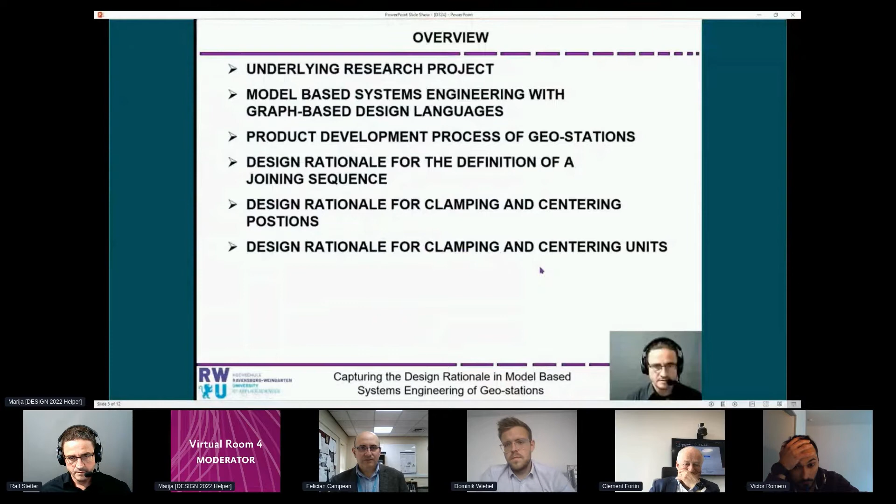The underlying research project is called Digital Product Lifecycle, and there is a block talking about research theory, methods, and software development. There's a system integration happening using design languages, and we develop the engineering framework through the steps of requirements, design, product architecture, modeling, simulation, test, digital factory, and cost and energy analysis. So the whole product lifecycle in a digital manner, and there are different use cases. One is focused on automated design and digital factory.

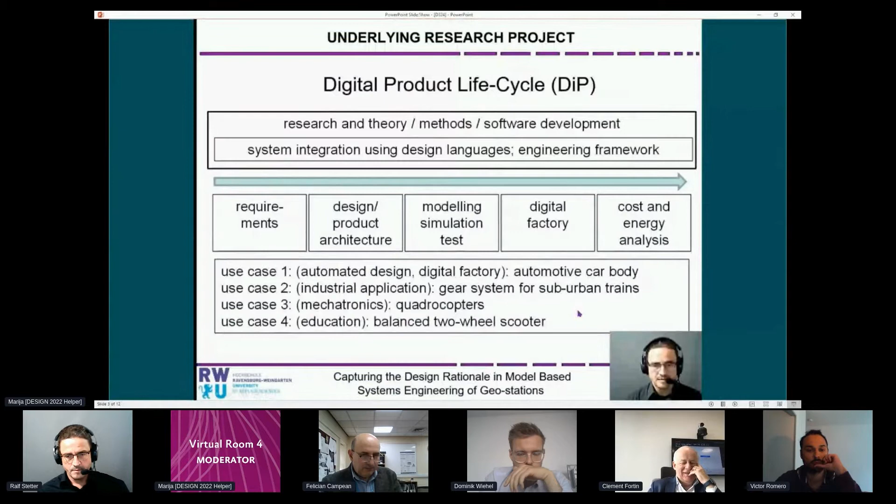That's where I present today about automotive car bodies. We also look at gear systems for suburban trains, for quadrocopters and multicopters, and balanced two-wheel scooters as an educational use case. So a main part are graph-based design languages.

When we have graph-based design languages, we have some programming happening. There's vocabulary and rules which build up a design language, and this is programmed by human beings on the basis of certain ontologies, abstract geometry, abstract physics, and so on.

And then if this design language exists for a product family, it can be compiled using a certain kind of software developed at the University of Stuttgart, Design Cockpit 43. This is a compiler, and the result is a design graph, which can be transferred into multiple data formats that are generic, like for Siemens NX, CATIA V5, MotionSolve.

If you look at multi-body systems, finite element methods, or OptiStruct, and so on, there's a general information flow from the human definition and programming in the design language, then to a machine compilation and execution on the right side. This is done by an engineering framework based both on unified modeling language together with graph-based design languages.

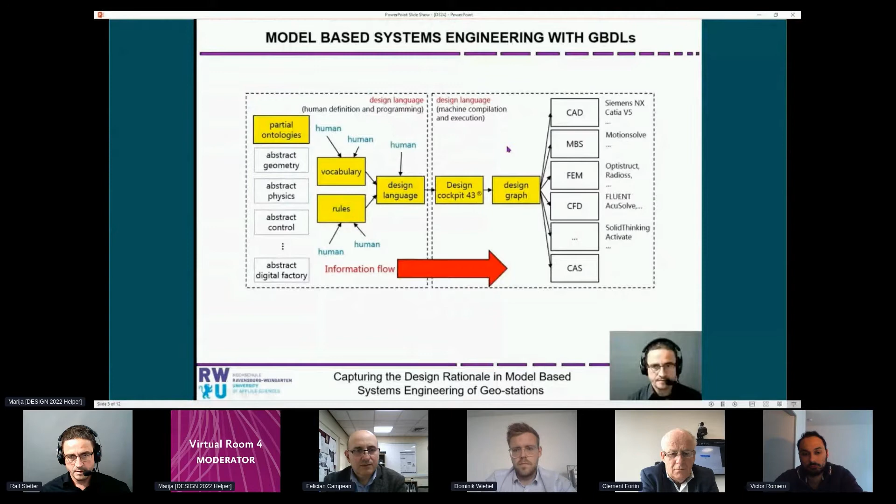Now, at this time, we want to focus on Geo-Station. A Geo-Station is a station in the assembly line of automotive car body, and it's used to ensure position and orientation of several product components, so they are brought together.

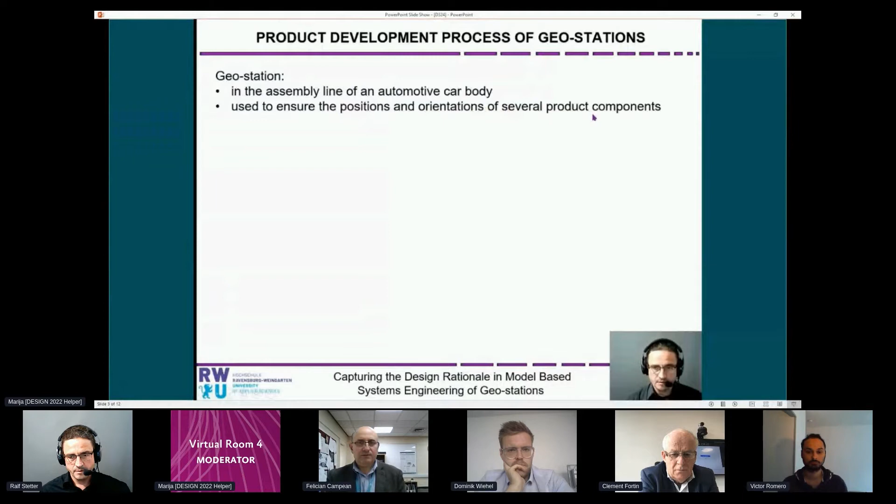If we look at the process, we first have requirements from the product. We have product components leading to a joining sequence, and then a production concept, which is the main point we'll discuss here. There will be the joint positions, and a setup and fixture concept. There are also requirements from layout. Everything needs to be accessible and reachable, so there will be interference objects and robot positions.

From this, packaging will happen of this Geo-Station. There is very important collision detection. And so finally, we will get to the geometry synthesis of the whole Geo-Station.

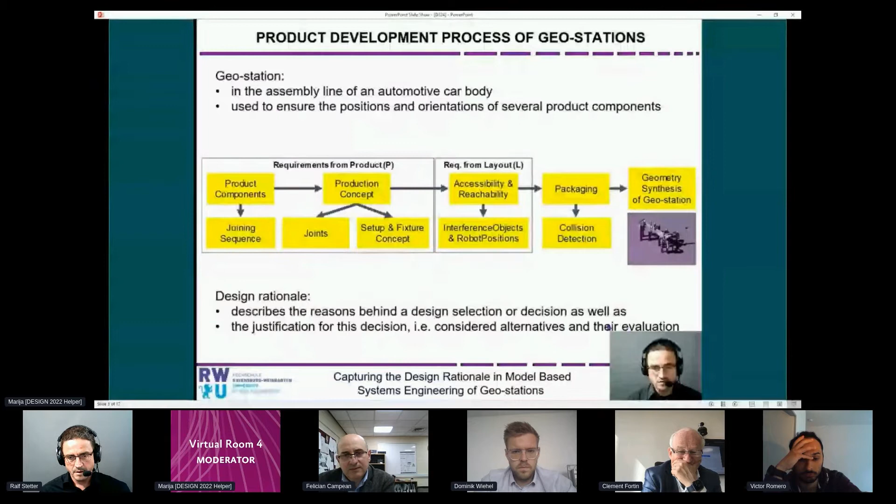One important point of this talk is the design rationale. A design rationale describes the reason behind the design selection and the decision, but also the justification for this decision - which alternatives are considered and how are they evaluated, so that someone knows why something was decided, why something was selected.

So if we look for the joining sequence, how the components are joined, here iterative search happens, and there are certain optimization criteria which build up the design rationale. This is accessibility and joining time. Here you see the exemplary definition of a joining sequence with the UML classes on the left side, and here the final assembly with two sub-assemblies.

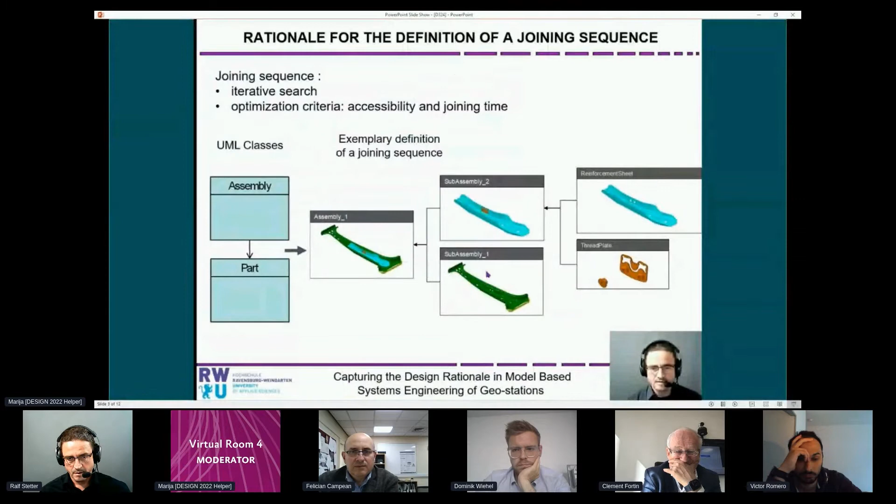One sub-assembly consists of a reinforcement sheet that you see here and a thread plate, and the other sub-assembly is the component itself, which is the B pillar of a car body.

The next step is finding the rationale for clamping and centering positions - where do I hold this part, this B pillar, and at which positions do I achieve a safe centering? Here you see the UML classes ClampingLoc and CenteringLoc for location, and here there are centering and clamping locations as seen here.

So usually in a production concept, there is a joining plan - where have the components to be joined - then a clamping plan, where are they held, and centering, how is their position realized. And in an engineering framework, a consistent representation of this is possible.

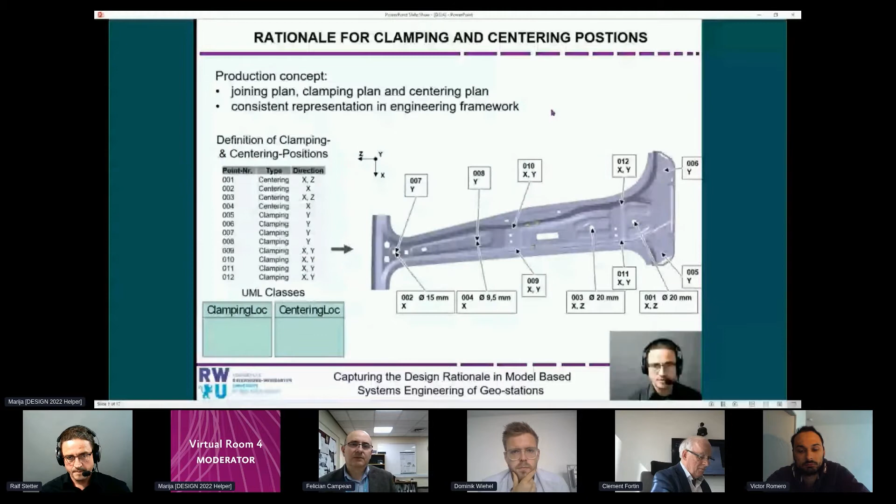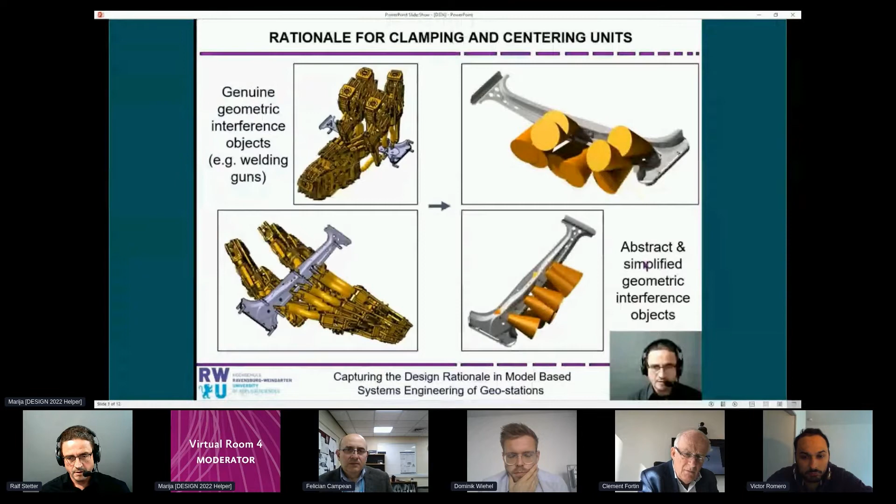Now, next step is to come to the real unit. So what we here have is, for example, welding guns. Here you see the genuine geometric interference object, which are really complicated, as you see here. And in order to allow a search for the best position, we work here with abstract and simplified geometric interference objects in order to be able to find the optimal places for clamping and centering units.

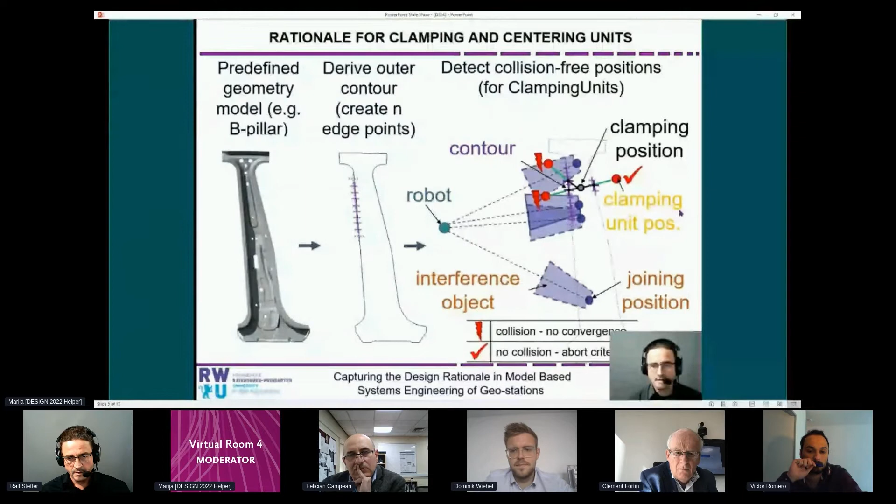Thank you very much for your attention.

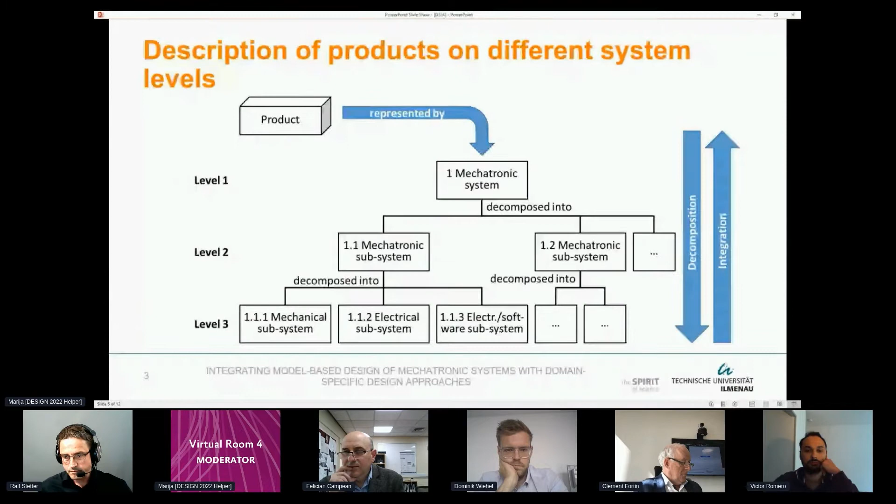Approaches for the development of mechanical subsystems are well known. The same can be stated for the other relevant domains. At the end of the development activities of the domain-specific subsystems, a detailed description of them must be available for the further product life phases.

However, the domain-specific approaches and models often reach their limits when connected to the mechatronic system levels. Systems engineering approaches are placed on the mechatronic system levels and mainly support the decomposition of functions and system elements, as well as the verification of the integration. Therefore, it is often useful to extend the known approaches at the mechatronic system levels with system engineering approaches.

Against this background, the following three research questions are discussed in the paper. How do systems engineering approaches help extending existing methodologies and methods to deal with different mechatronic and domain-specific system levels?

Which added value do semi-formal system descriptions offer at the mechatronic system levels? And the third one, which information has to be exchanged between the different system levels and how to do that? The questions are discussed in the paper. I would like to present you a few excerpts here.

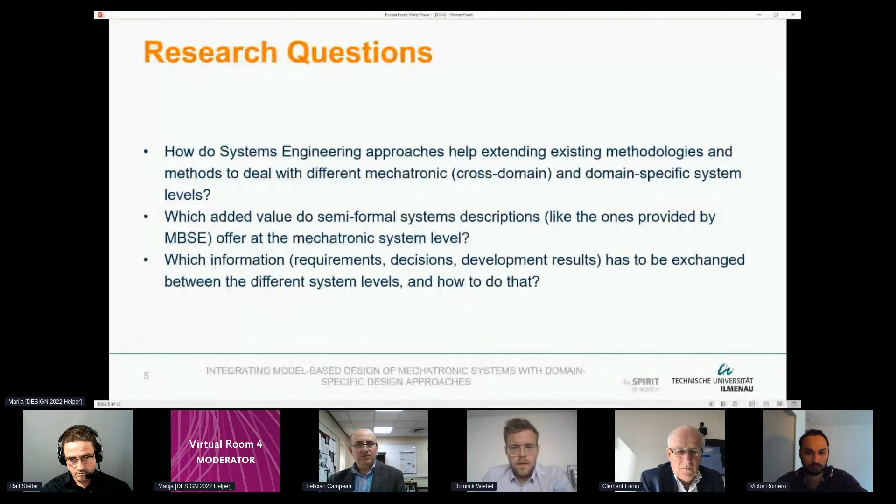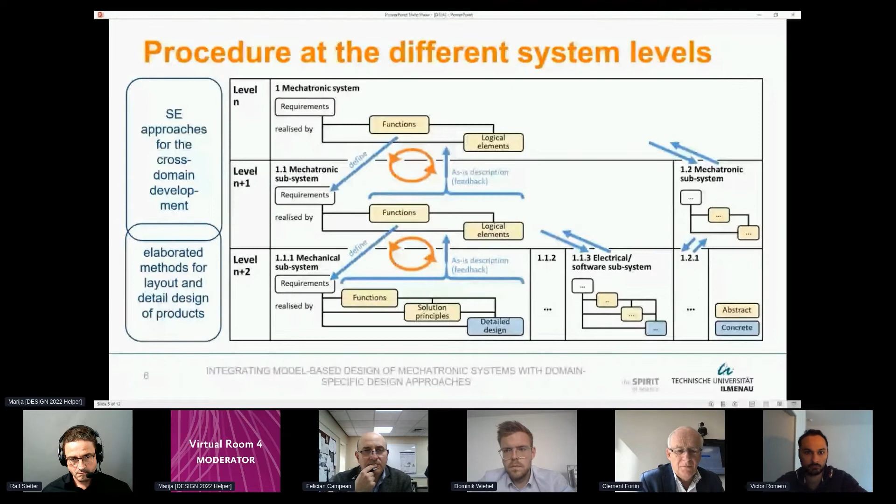Domain-specific approaches work very well as long as the functions can be implemented mainly by physical principles. On the mechatronic system levels, besides these functions, often logical functions are needed. Logical functions define, among other things, when which physical functions are active. These functions usually have complex dependencies and form complex effect chains. The handling of these logical functions and their decomposition is supported by systems engineering approaches. This is one reason for considering systems engineering approaches besides the domain-specific ones.

The paper compares the different goals and constraints of the approaches at the mechatronic and mechanical system levels. On the slide, you can see a part of the comparison. It is easy to see that the goals of the approaches have similarities, but there are also differences at the different system levels. Therefore, according to the current state of research, the different approaches should be used in a complementary way. For this, interfaces between the system levels are necessary.

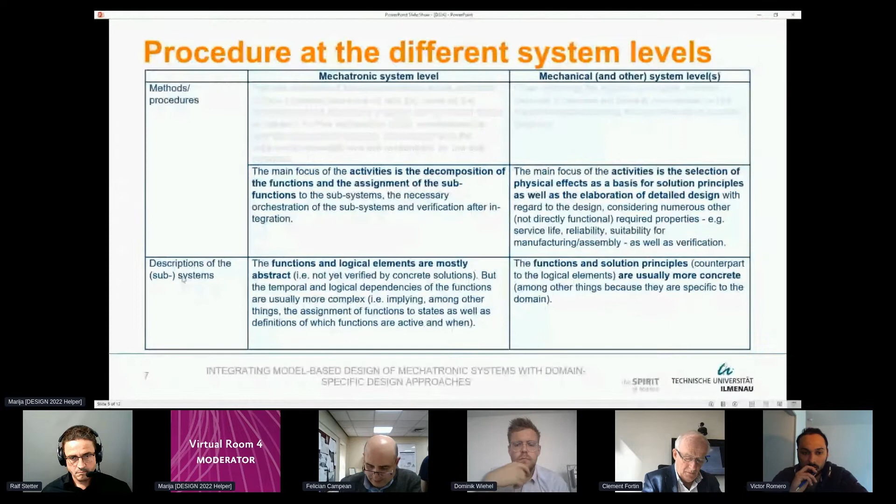The interfaces concern the methods and procedures, as well as the description of the system and subsystems, which are also compared partly in the table. The description of the system and the subsystems is done with different models. Important ones and related tools are shown here on the slide. Between the models of the different approaches, information must be exchanged bidirectionally.

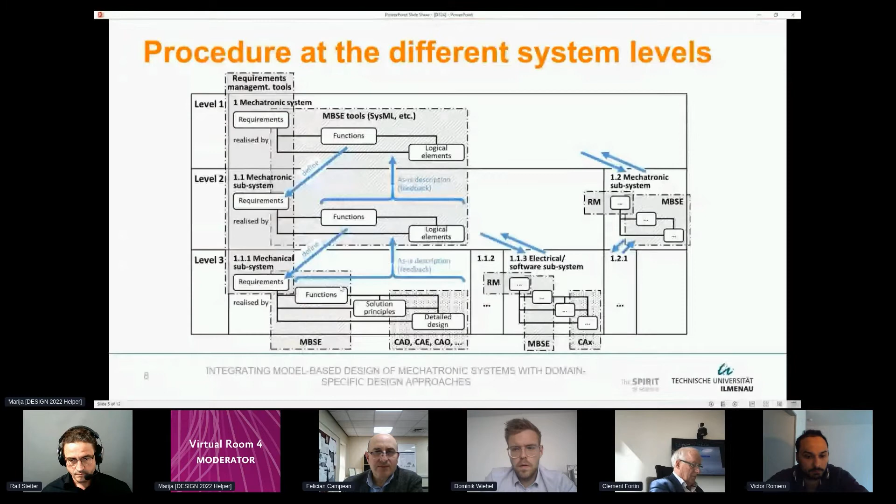When transferring information to the mechanical domain, these are primarily mechanical functions, interface requirements, as well as requirements for further decomposed properties. The combined procedure using different approaches on the system levels is explained using an example from precision engineering. Here, it can be seen that different decompositions on the mechatronic system levels are useful before the detailed development in the domain makes sense.

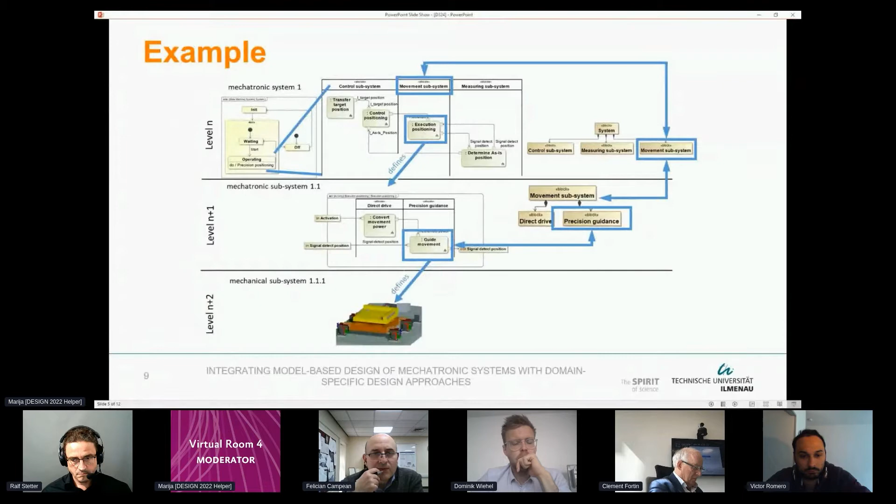The combination of system engineering and domain-specific approaches is becoming increasingly important. Interaction of the approaches must be clearly understood so that the approaches on the mechatronic and domain-specific levels can work together efficiently. A challenging question for the future is whether it makes sense to leave the different approaches in parallel or whether a merge makes sense.

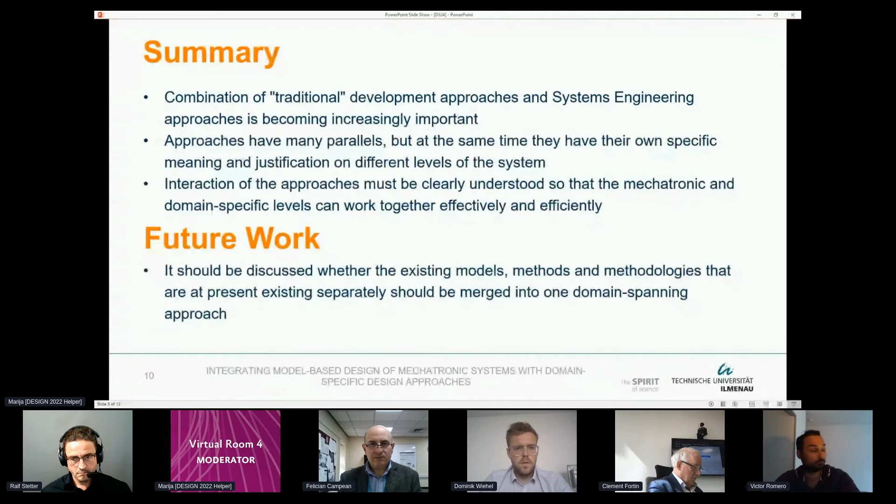This is a question that I would also like to discuss with you during the session. I look forward to the discussion with you during the conference.

Hello, I'm Victor Romero, and I will present you the work we have done with Romain Pinquié and Frédéric Noel, for which we propose a survey of model-based design reviews, the current practices, and the future challenges.

In the past years, we observed a paradigm shift from document-centric design, for which all the data produced around the design of a system are in a document shape, to a model-based design, for which each data produced is in a model shape. Depending on the community, there are a lot of different names for this kind of design.

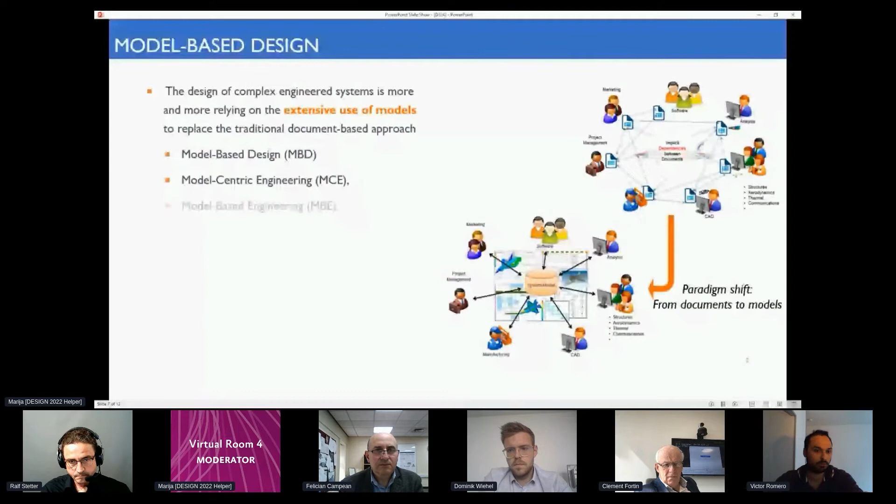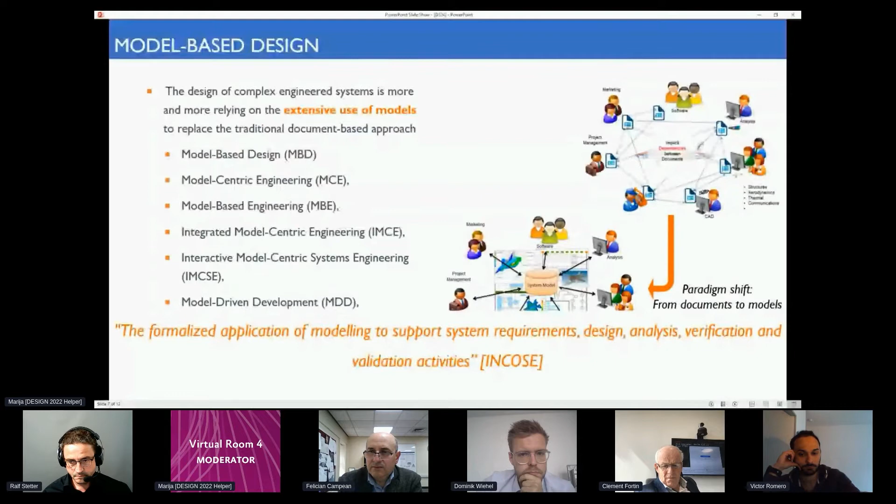We will use model-based design using the definition from the INCOSE, for whom the model-based design is the formalized application of modeling to support system requirements, design, analysis, verification, and validation activities. Now we want to understand how this paradigm shift has impacted the design reviews activity.

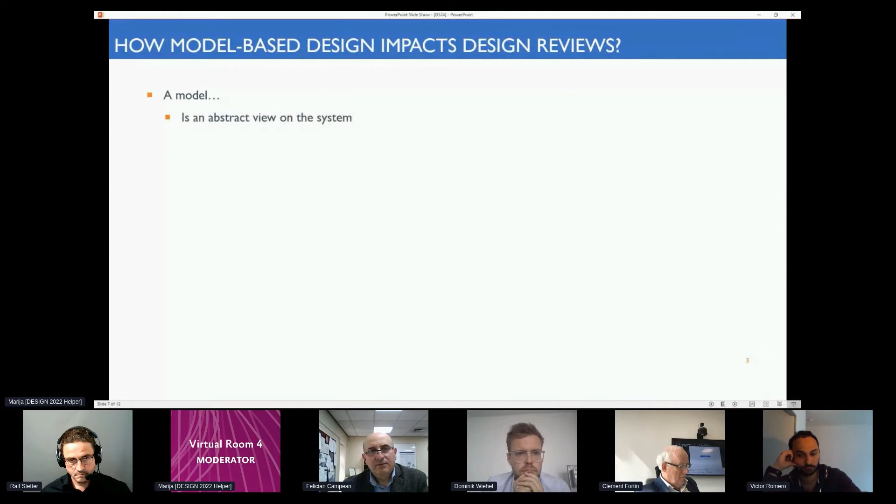First of all, a model is an abstract view of a system. It relies upon a domain-specific modeling language, and so we can produce this model with different software in different languages. And it aims at helping to answer questions. For example, is the specification complete or correct? We have there several examples of questions that models can help to answer.

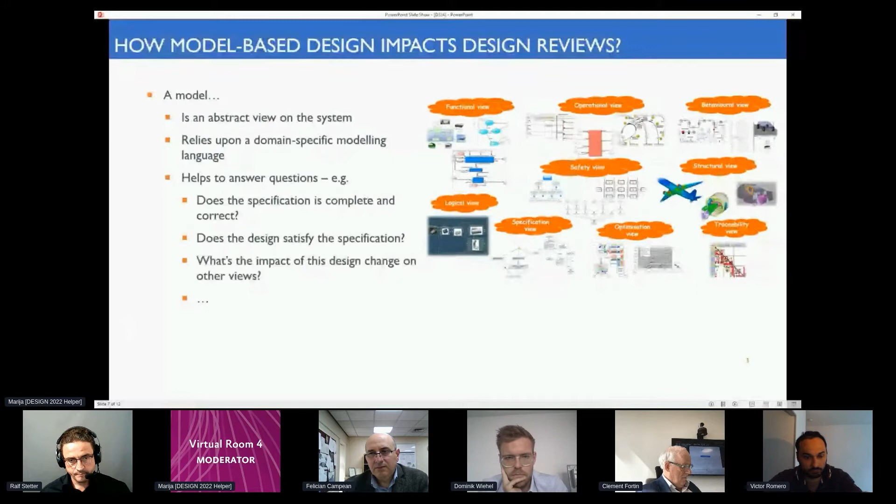And how this paradigm shift, so from document-based design to the model-based design, has impacted design reviews. Mainly, we are interested in understanding the changes for the collaboration, for example, between experts and non-experts, and how to deal with models' interdependencies.

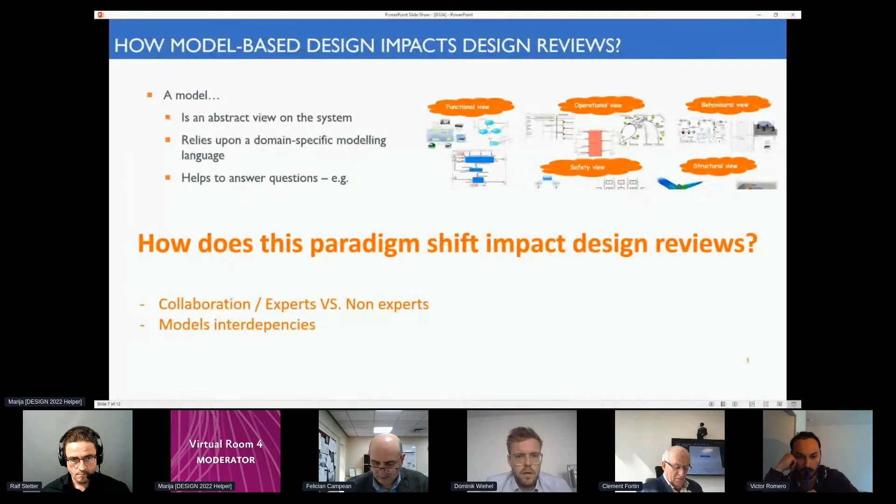In the literature, we can find some studies already interested in studying the practices during design reviews, but these studies are not interested specifically on these model-centric, model-based design reviews. And we also can find some prototypes around design reviews, but mainly around only one model, more specifically around the CAD model.

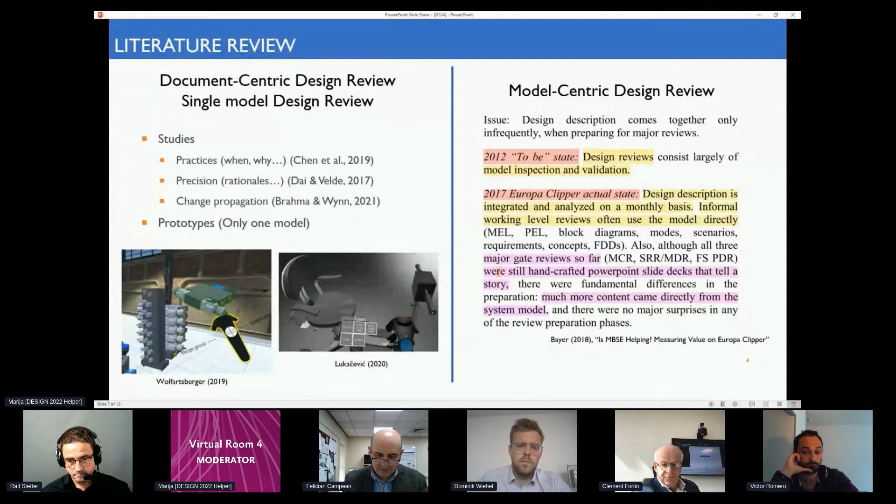We found only one reference talking specifically about model-centric, model-based design review, saying that when design reviews concern only experts, the models are well used and efficient to help in design reviews. But when a lot of different stakeholders are impacted or participating, we go back to a document-based presentation with handcraft PowerPoints, for example, and almost return to a document-centric design review. Our goal is to study the current practices in model-based design reviews, providing a survey, and we will present this result in the next section.

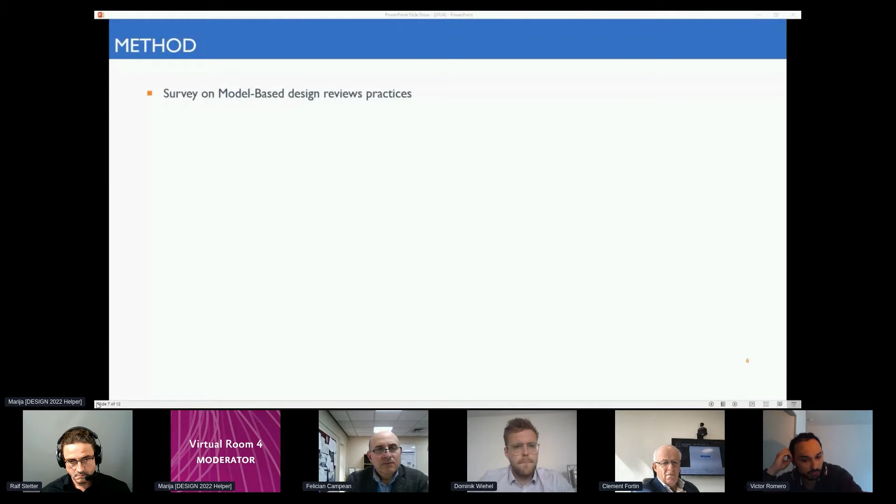First of all, about our methodology. Our survey is on model-based design review practices. We want to understand the practices, and it is a 9-question survey in English, web-based, in order to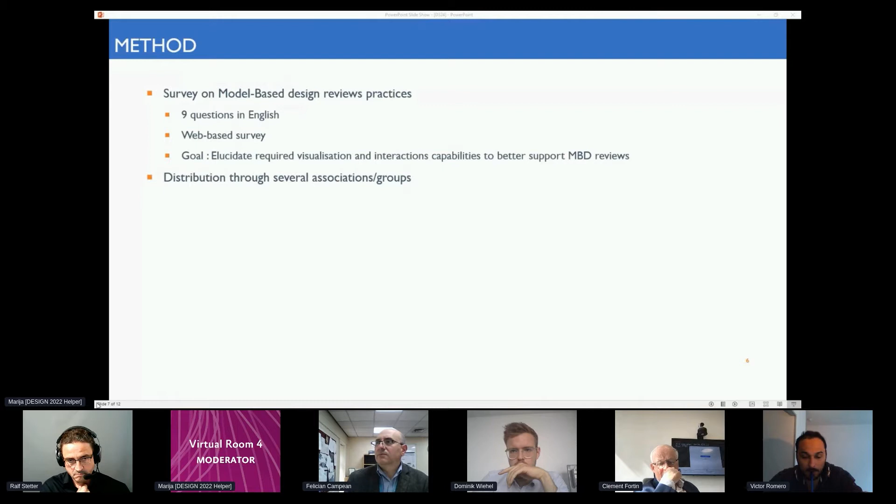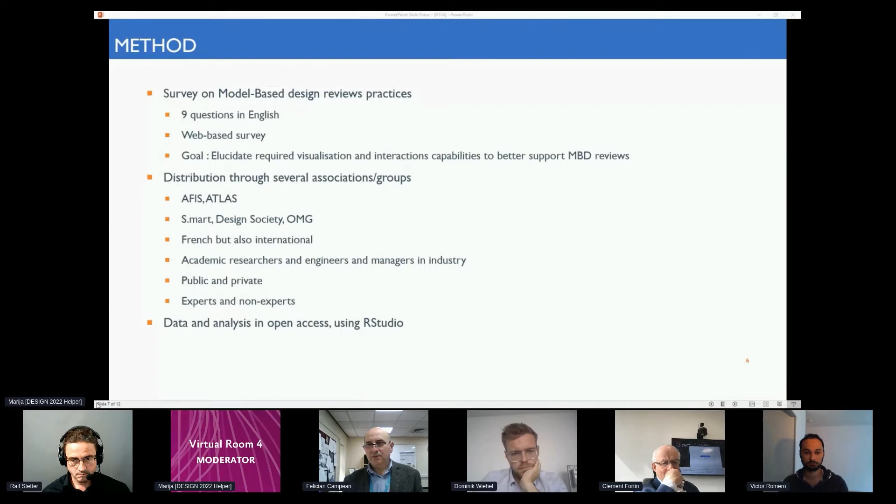propagate it in a lot of different communities. Our goal is really to elucidate the requirements, the required visualization and interaction capabilities to better support model-based design reviews. We distribute this survey through several associations or working groups, such as AFIS, Atlas, S.mart, Design Society, also OMG, etc. Our goal is to aim at a French community, but also an international community, academic researchers, but also engineers and managers from industry, the public and private sector, and mainly experts and non-experts of model-based design.

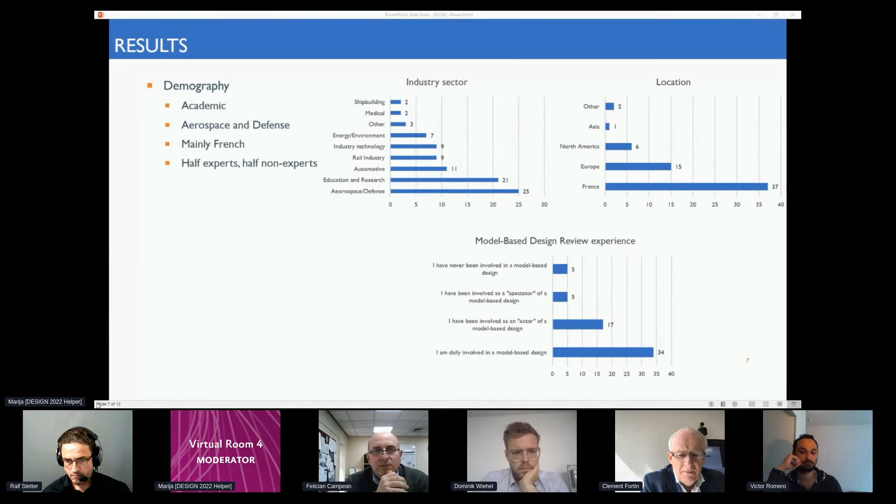Now we will present our results. First of all, about the demography of the respondents. They are mainly from academic researchers or engineers in aerospace and defense domain. They are mainly French, and we have half experts and half non-experts of model-based design reviews.

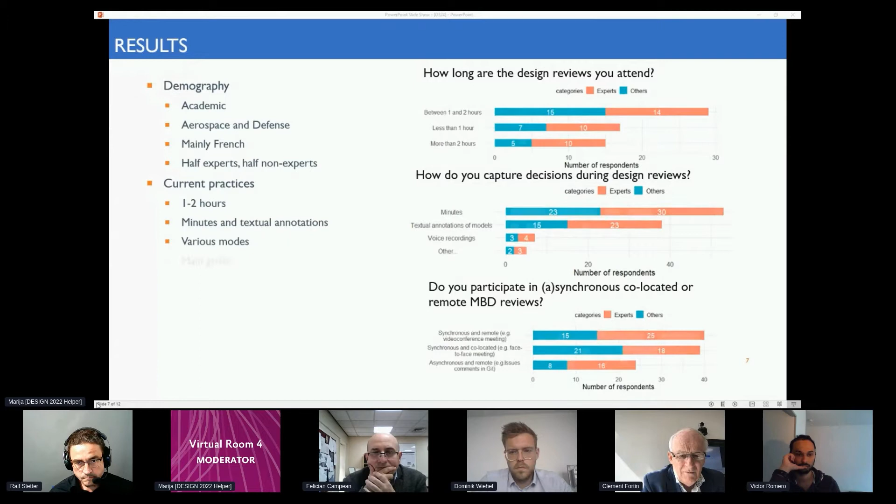Their current practices are 1 or 2 hour long design reviews. To collect and capture the decision, they use minutes or textual annotations, and they do model-based design reviews in various modes, for example synchronous or asynchronous reviews. The main goals of a design review are validating the requirements, understanding a design in another way than their own model, verifying a design against its requirements, and analyzing the change propagation.

Finally, the goal of our survey is to provide a list of recommendations and future challenges on model-based design review research, and to provide a list of needs that future design review environments must have. The last question of our survey was about the difficulties faced by engineers during model-based design reviews, and this question helped us raise this list of recommendations.

We think that design review environments must have a way to make the implicit interdependencies between models more explicit and clear, and must allow access to the models in a unique design review environment without the loss of crucial information that today's practices have. These models have to be semantically transparent because of the difficulty to understand the language of another engineer. And the environment must provide a holistic bird's eye view, a place where we can visualize all the models produced around the design of a system.

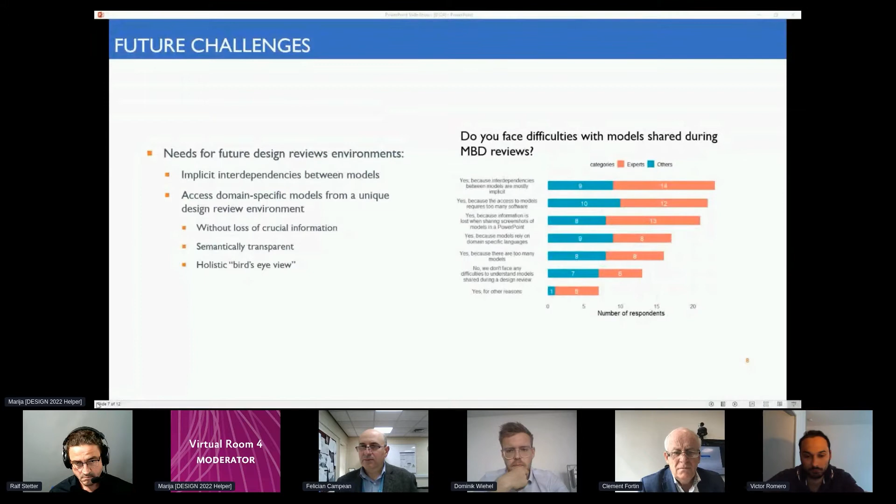Thank you for your attention.

Hello and welcome to my presentation. My name is Dominik Wiechel from the Heinz-Nixdorf Institute in Paderborn, Germany, and I want to present my paper about the model-based effect chain analysis for complex systems.

As you all know, the complexity in the development rises, for example, for the cyber-physical system itself, but also within the company, including all their processes and communication, and in the environment, including market regulations or supplier demands. These elements are linked to each other, and cause-effect relationships have to be identified. Effects can propagate from one element to the other, which can lead to increasing costs, changes in quality, but also project failure. Existing model-based approaches only consider specific aspects of the system without including these upstream and downstream elements.

And this leads to the following research question: how do existing modeling methods need to be adapted to enable systematic modeling and analysis of effect chains for complex technical systems?

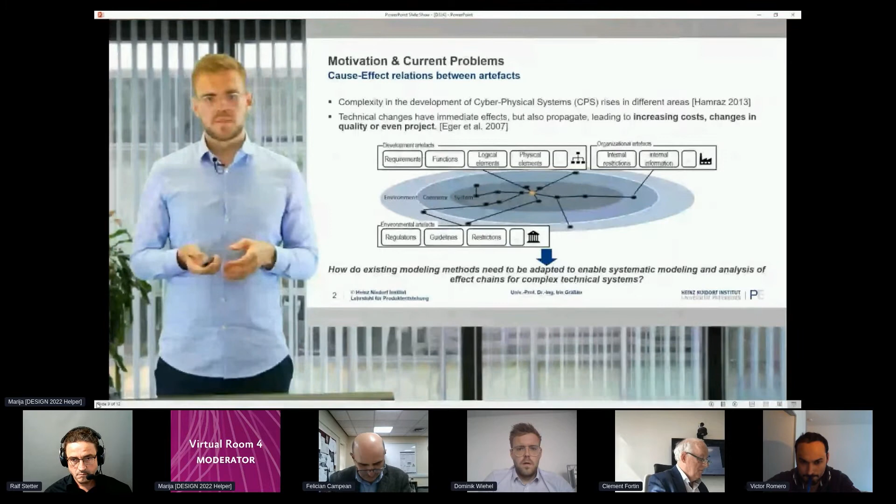Therefore, we created a 4-step approach. In the first step, we made a systematic literature analysis. Then we made the synthesis of literature and developed our own method called the MECA method, and evaluated it within a company project with an automotive OEM in Germany.

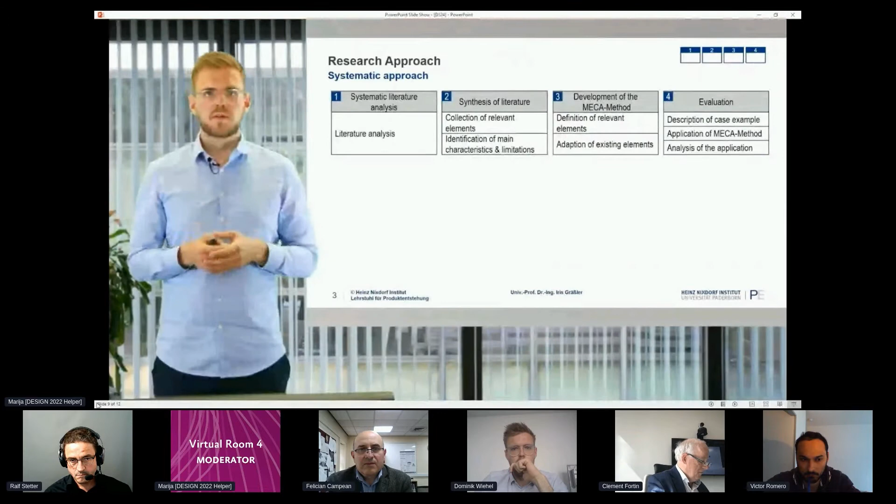In the first step, we identified 725 papers in the databases of IEEE, Google Scholar, and Design Society, and used KO criteria as well as a reading scheme to reduce them to 16 approaches.

These approaches have main characteristics, for example the deliberated view: a set of elements is identified and modeled, and every effect chain has a starting point and an ending point, with other elements in between connected using traceability information. Also, all these elements are connected using explicit modeling tools and modeling languages.

Based on this synthesis, the definition of the effect chain is derived. Model-based effect chains of interdisciplinary complex systems are cause-effect relationships that are mapped using traceability and system element artifacts.

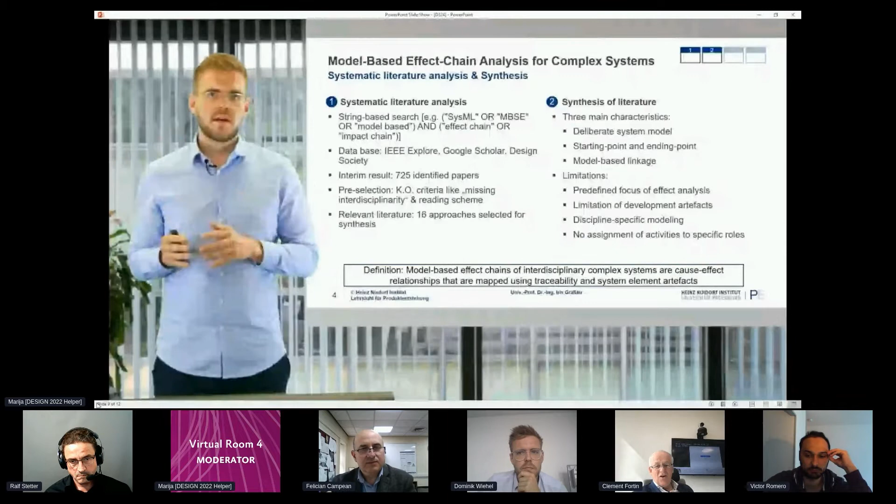But all these approaches have specific focus areas, for example modular product architecture or customer requirements, and this limits the representation of artifacts which can be used within the approaches. There are also some discipline-specific methods, for example from the mechanical or software side, not including interdisciplinary information. Based on these results, the MECA method was defined, divided into 4 steps.

In the first step, the goal of the effect chain modeling is defined. It is necessary to identify the system context and also the scope of the required system elements and their cause-effect dependencies which have to be modeled. This scope has to be clarified and defined as a goal and must be available for all interacting persons.

In the second step, the dependencies and system elements within the delimited system section and over predefined system levels have to be identified. The information to be modeled can include partial models and information about the granularity of the level of the effect chain. This set can also include typical artifacts like requirements and functions, but also organizational and environmental artifacts like regulations.

So the information to be modeled is identified, and then in the third step, this has to be modeled using existing tools and modeling languages, for example SysML. There it is possible to first customize the required model elements to include all the specific model information defined before, and afterwards define which behavioral or structure-oriented diagrams can be used.

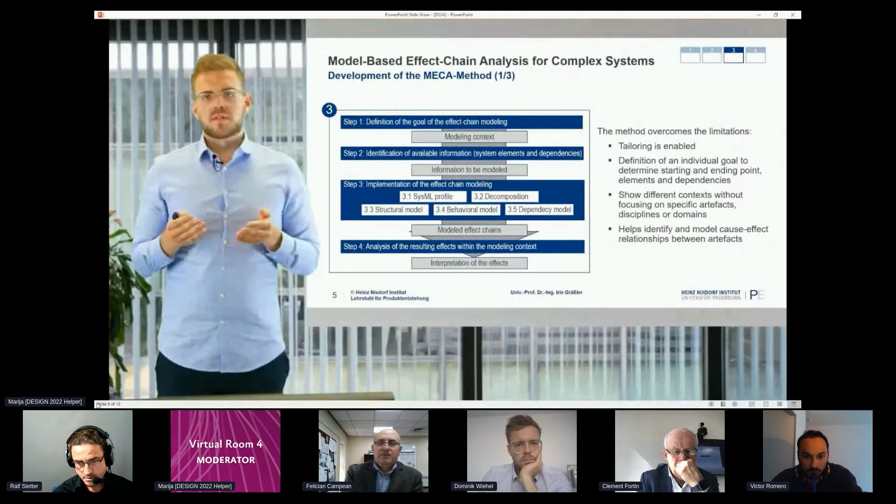For example, there's the possibility to use the IPO logic within the internal block diagram, which can serve as a central functional part of the effect chain. In step 4, the effect chains can be analyzed by different approaches, for example algorithm-based impact analysis, but also expert knowledge.

The evaluation was carried out in the context of a project on effect chain modeling for 30 systems of an automotive series of a major German automotive company, which has to fulfill the UNECE regulations. UNECE regulation 156 defines the software update management systems for these series, necessary for homologation of the series for the European market. So the impacts of changes in regulations or system components have to be analyzed, including their relations to requirements and functions.

Therefore, we made workshops with different participants to identify the necessary data with the help of design structure matrices. In the figure, you can see how regulations and their requirements are mapped to system functions in the IBD, which is in the middle and is a central part of the effect chain.

The aggregation of the system functions represents the customer function, and additionally the system functions can also be mapped to system components. So you have the effect chains coming from the regulations over the functions to the system components, including the organizational specific elements. Beside the successful application of the method, we used feedback from the workshops to improve our method.

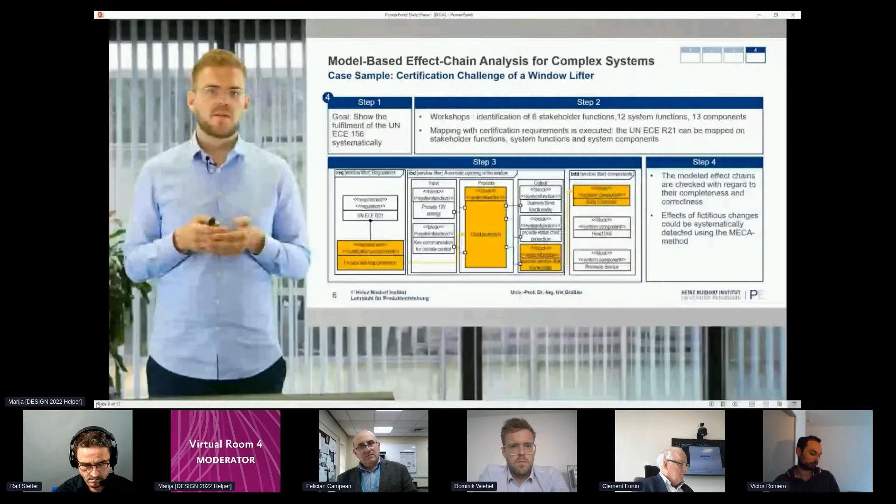A finding was that the goal for the participants has to be communicated explicitly, which is why the definition of the overall goal is our step one in the approach. Another finding was that during the workshops, it remained fuzzy which data is relevant for the effect chain modeling. This was also included in our second step.

The conclusion shows that our approach is based on the limitations and main characteristics of other approaches and should help developers model effect chains. We evaluated this in a project with 30 systems, and the time effort for modeling was just 35% within our project, while the effort for data collection and validation was a lot higher. We want to reduce this effort by automating and customizing our approach in the future.

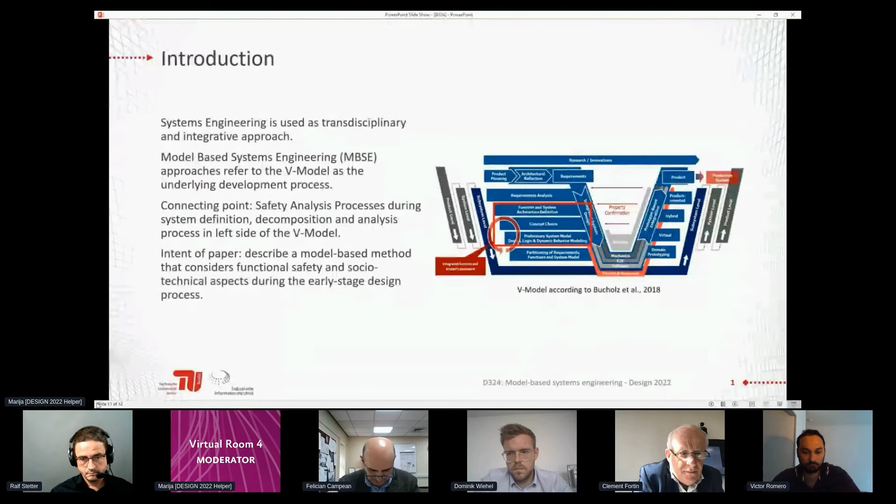The test person interacts with the hybrid prototype once the object to test is functionally defined already. This enables testing of the system and the socio-technical behavior, including human-machine interaction, and identifying potential risks.

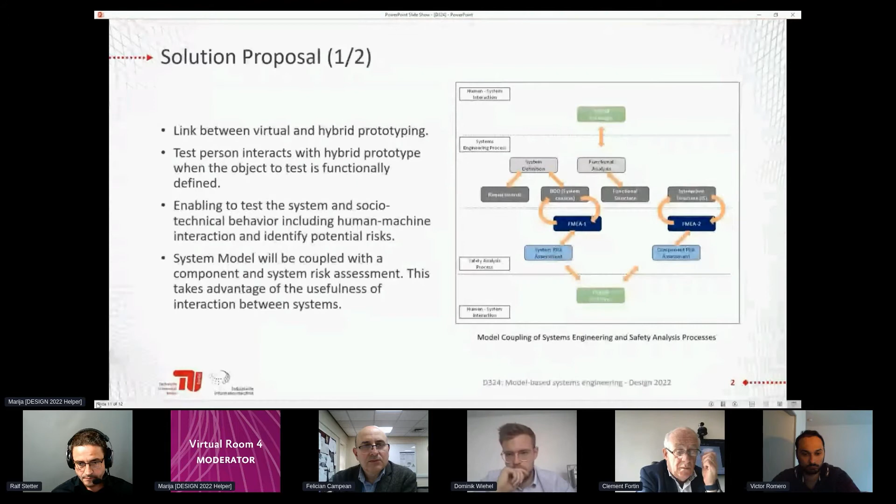The system model here will be coupled with a component and system risk assessment, taking advantage of the interaction between the different systems, such as changes management, or the function to trace back the whole design path.

To do this, as shown in the figure on the right top, we connect an FMEA done in Excel with a requirements list also done in Excel. This requirements list connects with a system model made in Cameo Systems Modeler, and then this system model with a behavior model made in MATLAB Simulink.

The connection of the FMEA to the requirements list is done through Excel hyperlinks. This can be seen on the figure on the right bottom, where clicking on such a hyperlink opens another sheet where the analysis is performed.

The connection of the requirements list with the system model in Cameo Systems Modeler is done through an internal requirements synchronization tool of the system modeler, which supports syncing requirements in Excel with the requirements list internal to the system model.

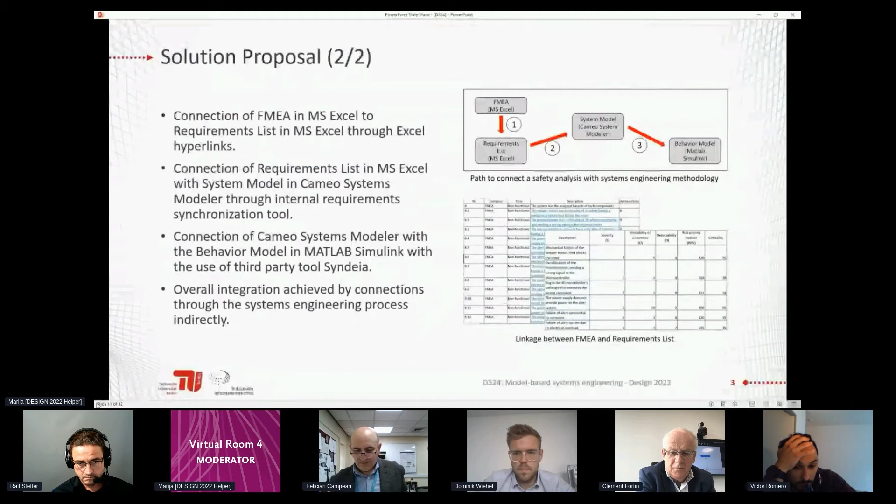Finally, the connection of the Cameo Systems Modeler with the behavior model in MATLAB Simulink is done using a third-party software called Syndeia, a tool to trace back between different models. The overall integration achieved by these connections is achieved through the systems engineering process indirectly, meaning it's not a broken process, but we'll get back to that later.

Our use case is a safe door opening system, also known as SDOS. It is a driver assistance system for cars that gives a warning when a dooring accident might occur. Dooring accidents are accidents where a cyclist crashes against an opening car door.

The system consists of two warning light systems, a vibration signal inside the door handle, a sound warning, and a motor for door closing. MATLAB Simulink is used for the warning signal generation as a response to virtual sensors that detect the cyclist, including a virtual cyclist, and dSPACE is used for car surrounding visualization.

There are three different scenarios modeled with different door opening angles that simulate different behaviors of the system. Socio-technical interaction between the cyclist and the driver can be tested with this use case.

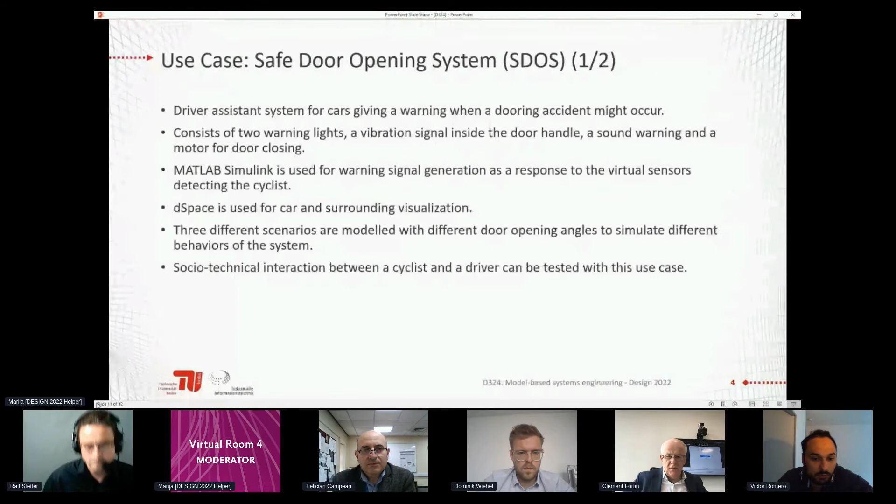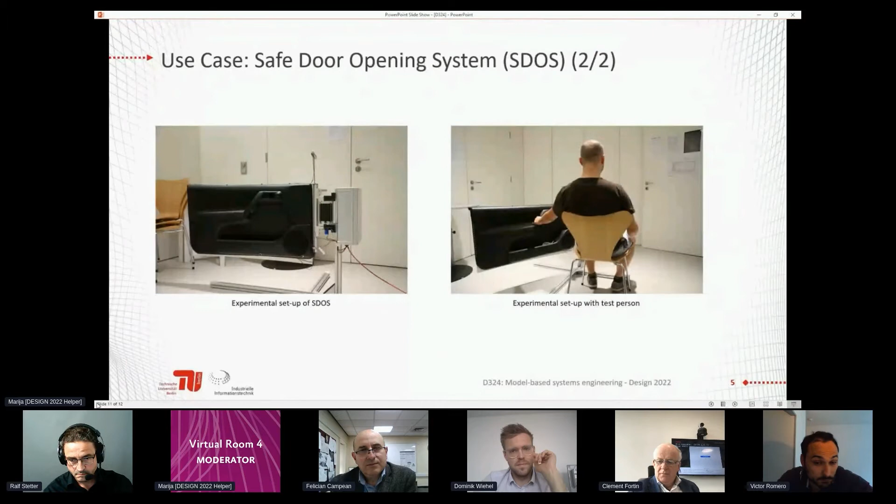Here are two images. The left image is an experimental setup of the SDOS, and on the right we can see the system with a test person.

As evaluation and conclusion, we can see the traceability between corresponding design artifacts from requirements until the test could be demonstrated. When applying the testing modes, the functional change of the products were tested, and this revealed connections between the elements and models. There were also some limitations by the use of tools themselves, like Excel is not an optimal tool to perform an FMEA nor a requirements list.

And there are also limitations related to cross-tool traceability, since the applied solution is a combination of different approaches like internal supported linkage or add-on supported linkage. The complete design path needs to be followed to trace back to initial artifacts.

As a summary and outlook, we can identify a potential that supports an automation of the trace link. This could improve acceptance of the tools and bring traceability benefits at lower time cost for engineers.

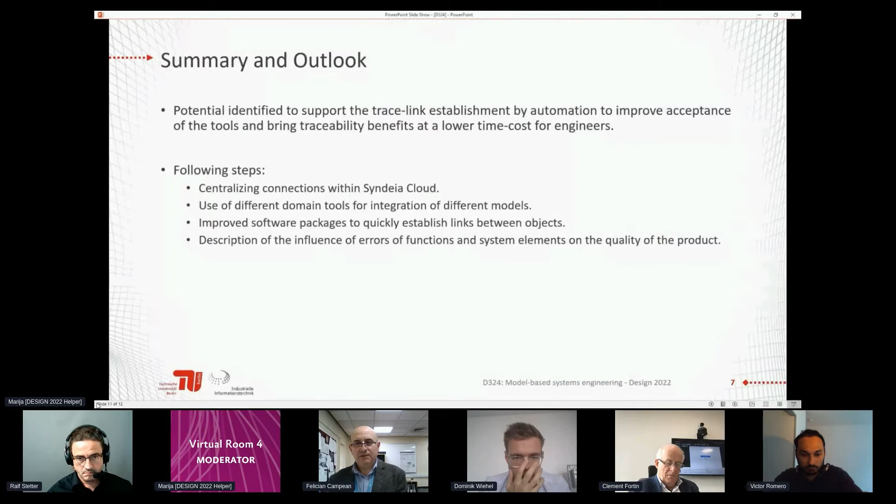The following steps we identified are centralizing the connections within the cloud, not using just one tool for all the trace links. Use of different tools for integration of different models, better tools that are more capable of doing this analysis. We want to use improved software packages to quickly establish links between objects, and also to describe the influence of errors of function and systems elements on the quality of the product.

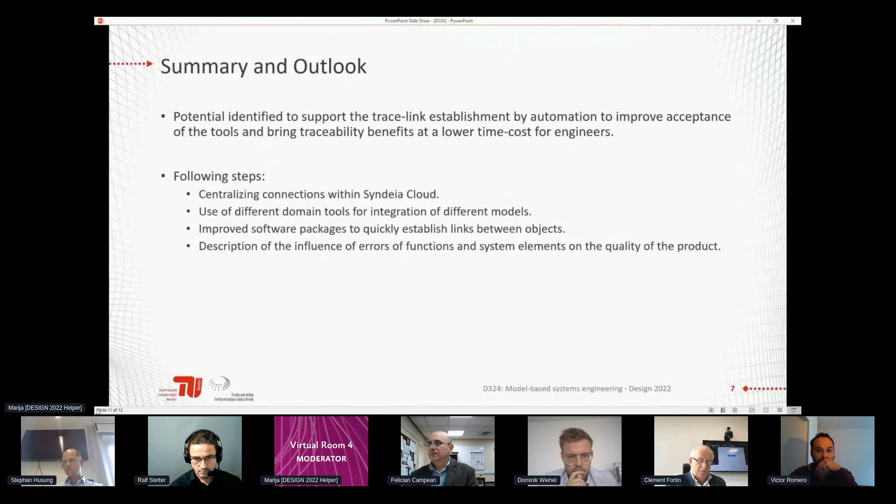Okay, thank you very much to all the authors for providing us with these very nice presentations. I couldn't help reflecting how well integrated these presentations have been in this session, because there have been some very common themes, and I couldn't help as we were going through thinking of how the methodology discussed by one of the presenters would apply in the context of the problem discussed by some of the other presenters. So I guess this would provide us some very good opportunities for having discussions across the presentations.

Just to use an example: Ralf was talking about the rationale and the use of graphical languages to capture that rationale, and then Stephan has been talking about logical functions, and then we talked about the cause chains, cause and effect chains, all supported by the same model-based systems engineering environment.

I celebrate this fact that we quite often use different language to denote the same sort of tasks, and that is to manage that decomposition of systems, ensuring traceability, and also capturing the rationale which ultimately explains the propagation of causal effects, or effects chains.